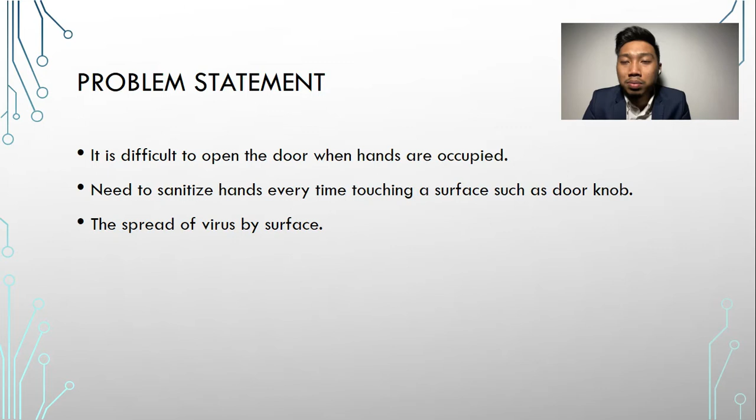touches the doorknob. Next, the objective is to reduce the force with a maximum of 800 Newton needed to be set on the foot door opener so that it can be used by all users regardless of their age. Next is to create a device that can reduce the physical contact between other people in order to identify the effectiveness of this product and to minimize the spread of virus towards the user. Lastly is to design and develop a device which users are able to use to open the door without touching the doorknob when hands are fully occupied.

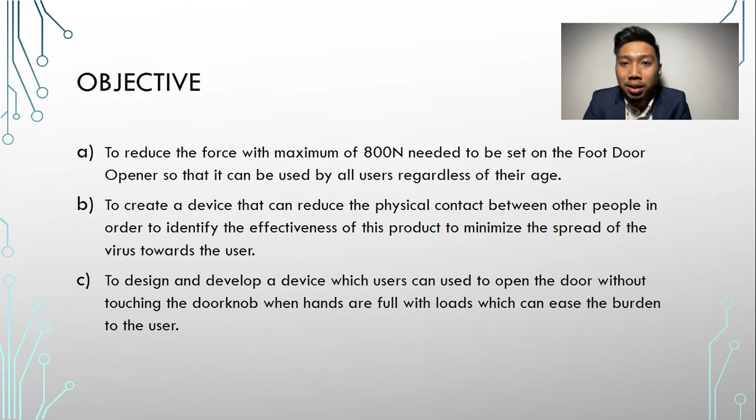Next is the literature review. The first one is we are using patent search for our design consideration. We have found a few concepts that could be considered as our reference for our product design. Next is benchmarking. We are using the existing product as our benchmarking. From our evaluation and research about the existing product, most of the foot openers in the market are either too simple or not compatible with different types of door and doorknob.

The last one is articles. There are also a lot of design concepts that can be referred to by reading a few articles that are related to our product. It can help us to improvise the design concept.

My name is Nur Afika binti Adnan. My matric number is B051810123. Methodology. Methodology is the method that we use to achieve our objective. First, questionnaire survey form. Based on this survey, we know the desire and we are able to get fast response from our respondents about our product.

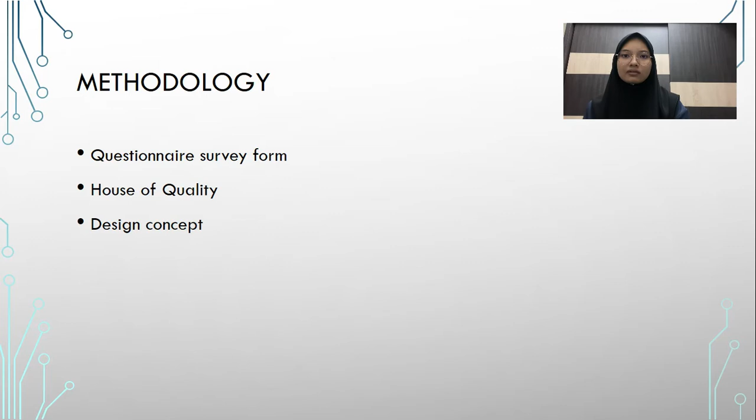Second, house of quality. We can translate customer needs and produce a product based on their requirement. Third, design concept. We do screening and ranking to get a suitable design to achieve our objective. House of quality. So, this is the house of quality that we generated from the survey that we conducted

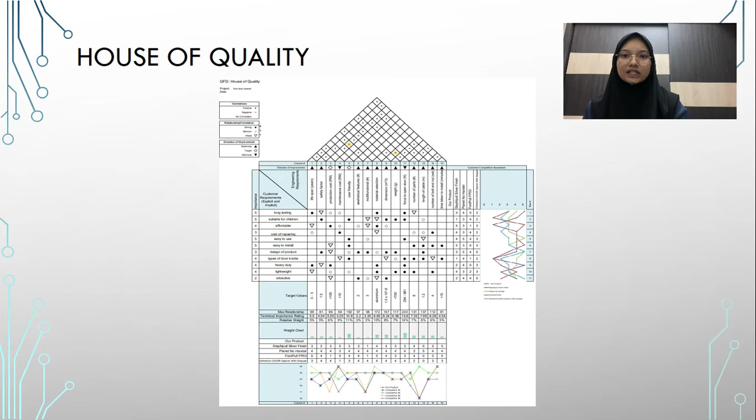earlier. Result. Based on the survey, we know that consumers need: first, a durable product. Second, suitable to use for all users. Third, product cost and cost of repairing are affordable. Fourth, easy to handle and install. Fifth, can be attached to all types of door. Sixth, attractive design. Seventh, lightweight.

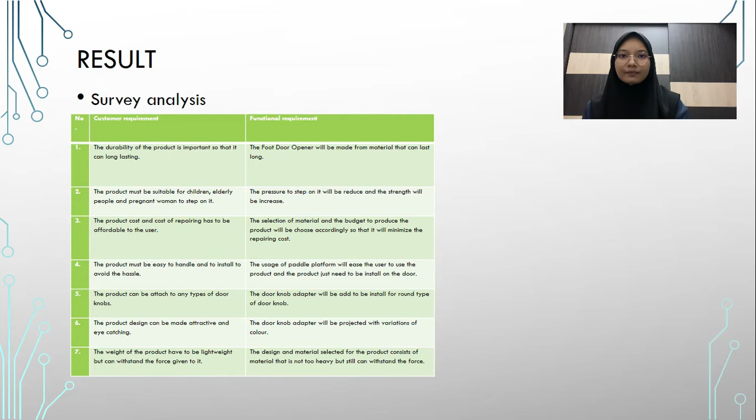My name is Muhammad Afar bin Sofi and my matric number is B051810061, and I will present the detailed design. This is the design of our product. We have two separate parts, the pedal part and the door adapter part, and both parts will be connected with a wire and clamps.

For the first part, this is the pedal for the foot door opener. There are two main components, which are a bracket and a pedal. As you can see, the bracket will be mounted with two 3 mm screws to the door, and then we slide the pedal part into the bracket. At the top of the pedal part, you will see a hole that will be connected through a wire, and then we latch it with a clamp.

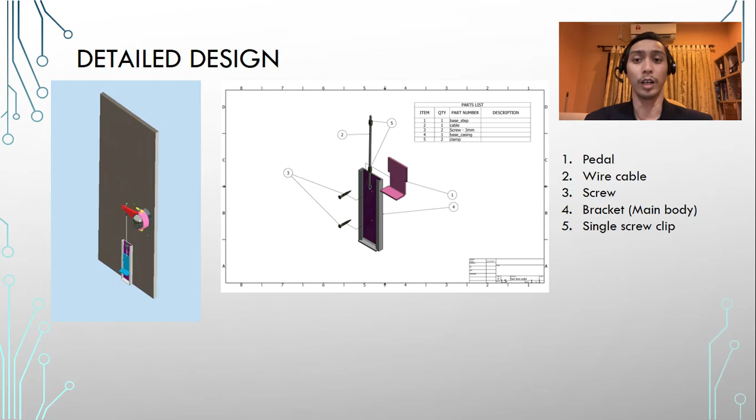For the second part, the doorknob adapter, the first half or the right side will be welded with an extension, or the lever part, to connect with the pedal part using the other end of the wire and clamp it. And the other side will act as a lock to the doorknob by using two sets of bolt and nut.

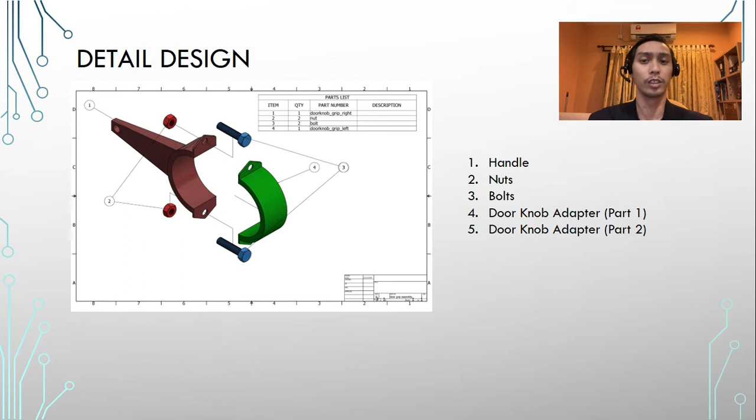The manufacturing process for the bracket undergoes a cutting process, where we cut the metal sheet, and then we form it into a bracket design. As for drilling, it is to drill holes for screws to be mounted. The pedal platform undergoes a cutting process to cut the metal, and then we form it, such as bending it into 90 degrees.

For the doorknob adapter, both sides undergo a cutting process and drilling process. As for the right side, the lever part undergoes a welding process.

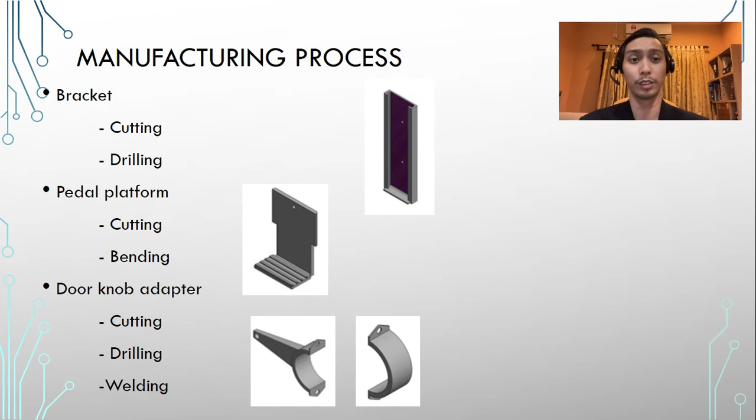Limitations in developing the product. First of all, it is time consuming to produce just one product, because we're using human energy instead of a machine. Secondly, it is very costly to produce the product. The raw material is very expensive to buy.

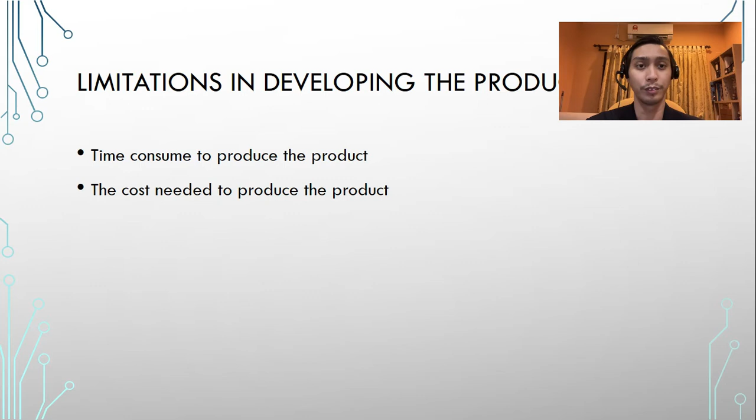My name is Nur Farha Fasha binti Muhammad Khairi, B0518101004. Design for manufacturing and assembly.

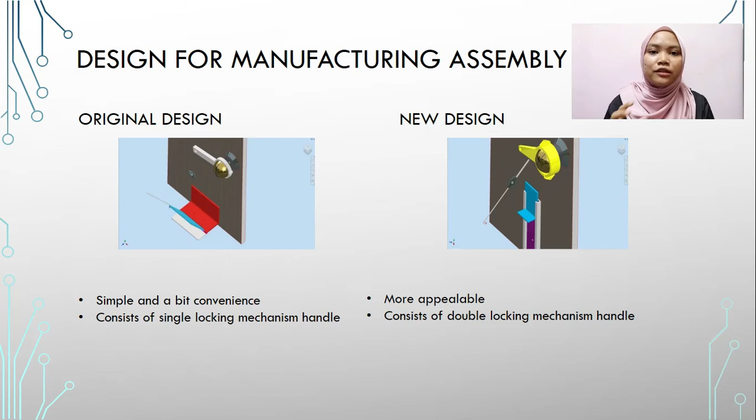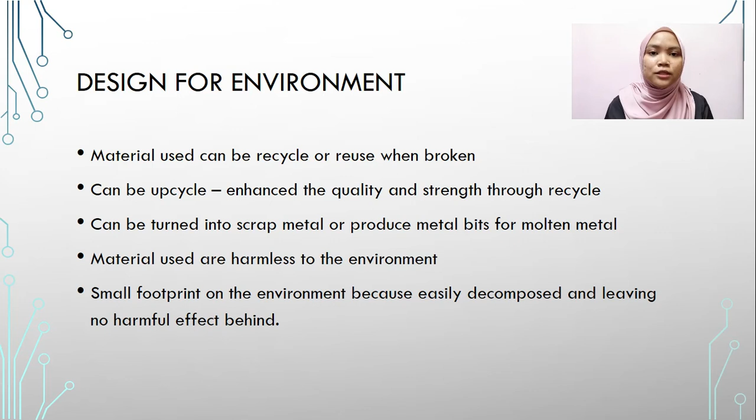Design for environment. In our final concept design, there are sustainability elements that can be considered as environmental sustainability. Each part of this product can be recycled or reused when it is broken. It also can be upcycled, where the quality of the material itself can be enhanced. Other than that, it also can be turned into scrap metal, leaving a small footprint on the environment and no harmful effect behind.

Moving on to the cost. In producing a product, we have to include the estimated cost for this foot door opener. Right here, we have material cost and direct labor cost. For material, we sum up the total for every part of the foot door opener, which gives 65 ringgit and 47 cent, while the direct labor cost is 19 ringgit and 8 cent. The total for both expenses is 84 ringgit 55 cent.

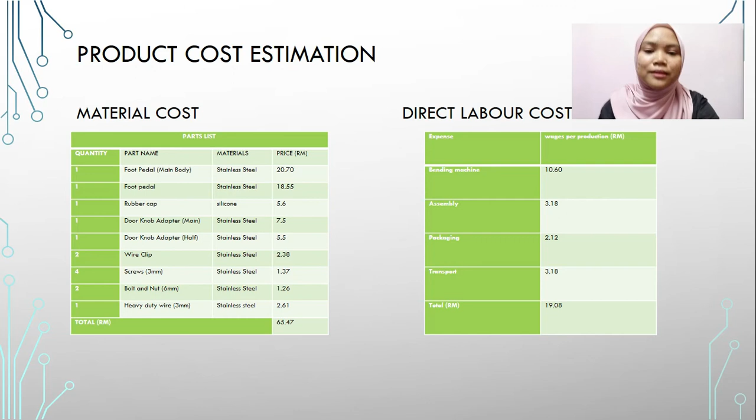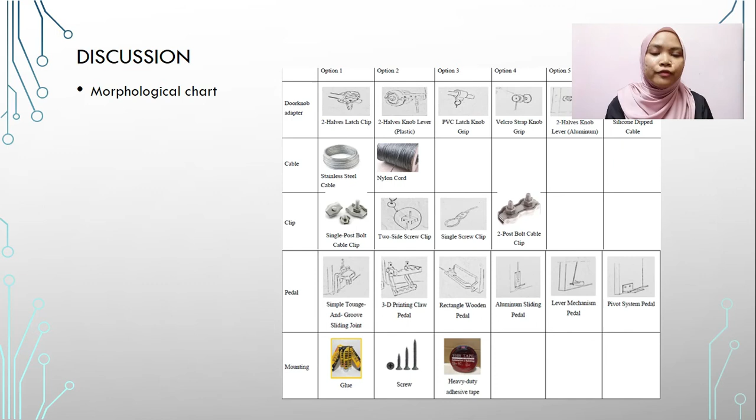Next is the morphological chart. The morphological chart is used to generate our design concept for the foot door opener. It creates concepts for the sub-functions of each product. Various concept designs are proposed to fulfill the customer requirements, and each and every part was chosen deliberately.

My name is Abang Muhammad Fakullah bin Abang Ahmad. Matric number B0518100090.

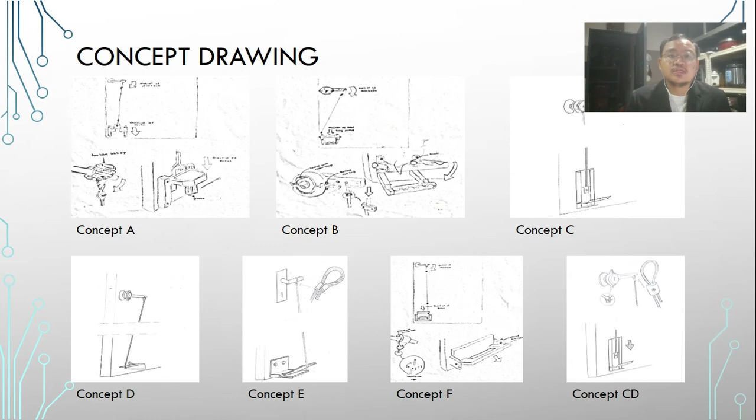Morphological chart. Various designs and concepts are proposed to consider the best design and dimensions for the foot door opener. In this morphological chart, we are able to come up with several design concepts to choose from. There are a total of 7 designs, which consist of various combinations of concepts from the morphological chart.

These concepts go through a concept screening process, where the selection criteria are based on customer requirements such as durability, safety, user-friendliness, etc. Concept scoring will select the best design for this product. Only 3 designs meet the concept scoring, which are concept A, concept F, and the combination of concepts C and D. Through this phase, concept C and D is the best design among all.

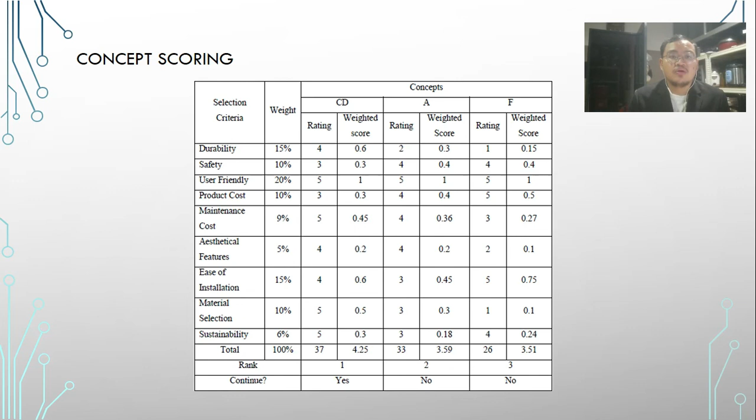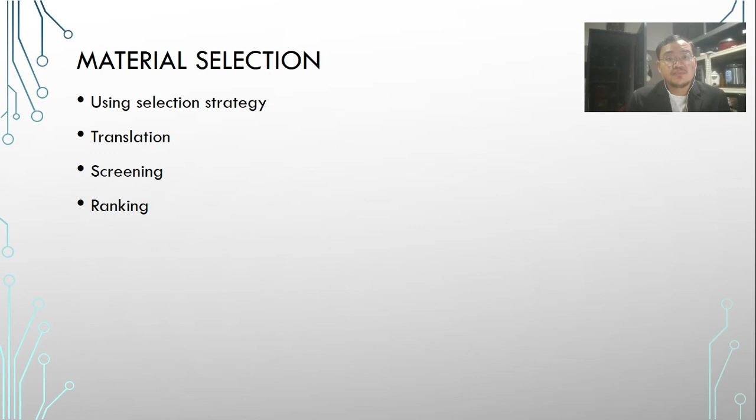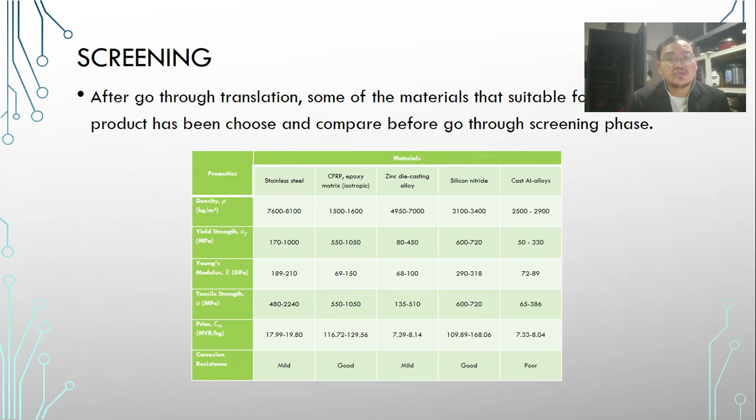Material selection stages. We are using a selection strategy which consists of translation, screening, ranking, and documentation. Translation is used to find the function, constraints, objective, and free variables for the foot door opener. Screening. Material screening is a process utilized to narrow down the number of materials and repeatedly improve the material selection. We consider this screening process the way to reduce the number of selected materials and finally select the best material for this product.

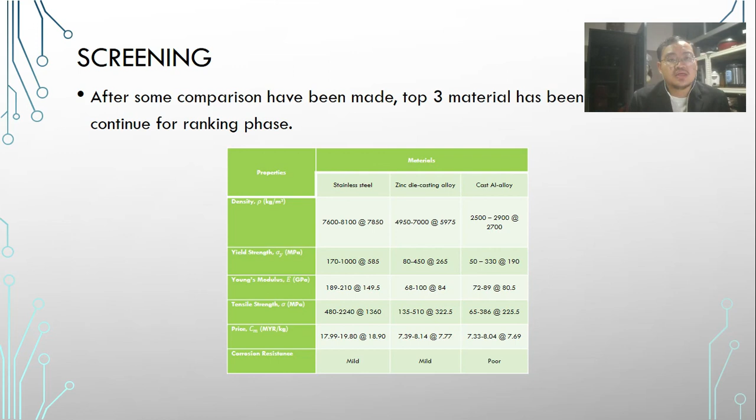Several criteria have been chosen to fulfill the requirements, such as density, yield strength, Young's modulus, etc. After some comparison, only 3 materials proceeded to the next stage, which is the ranking phase. Ranking. The objective of concept scoring or ranking is to choose the most excellent material to use in this product. We compared stainless steel, zinc die cast, and aluminum alloy, and we finally proceeded with stainless steel.

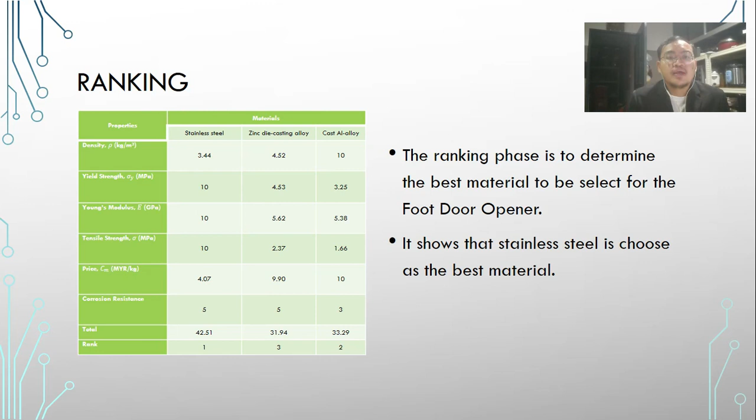As a conclusion, this device will surely bring a big impact to the community, helping decrease the transmission of viruses from touching surfaces and also helping users open doors easily while both hands are occupied.